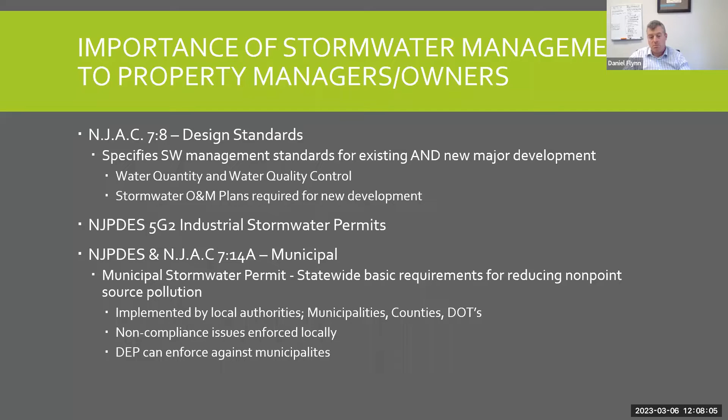So the industrial 5G2 permit, if you fall under this category, you likely know it because you have to prepare a SWPPP, a Stormwater Pollution Prevention Plan. You have to do monthly inspections of your operations. You have to do annual certifications with the DEP specifically, not just with the township.

On non-permitted sites, which is probably about 98% of the sites that are affected by this ordinance in Hamilton, you have to comply with the stormwater O&M manual. If the property doesn't have an O&M manual, which it likely doesn't if it was constructed before 2005, we just defer to the state standards for how the site's stormwater system should operate. The responsibility of that is the property owner or the property manager, ultimately the owner.

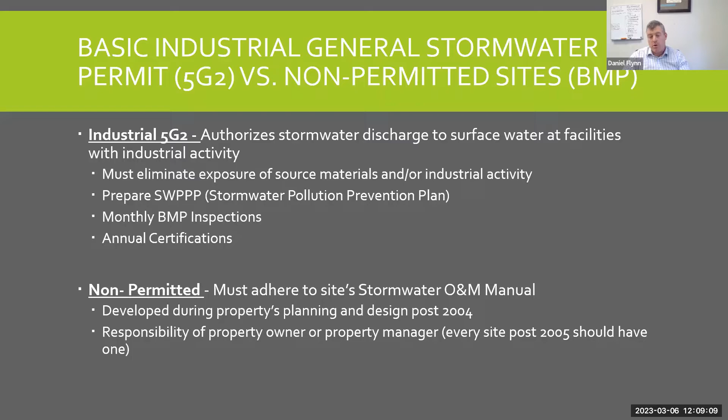It's supposed to gather probably between 2 to 4 feet of water, sometimes more, but generally they try not to make them too deep, and it's supposed to convey that water downstream in a methodical manner, which is designed to drain within 72 hours after the storm. So that's one of the things that we look for in the inspection, is whether or not the basins are drained, when the last level of precipitation was, etc.

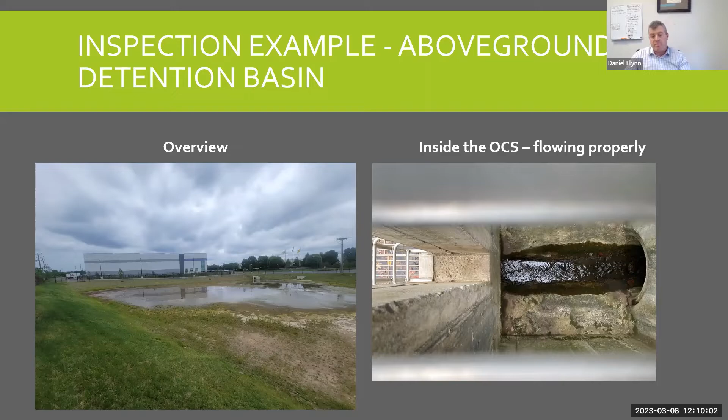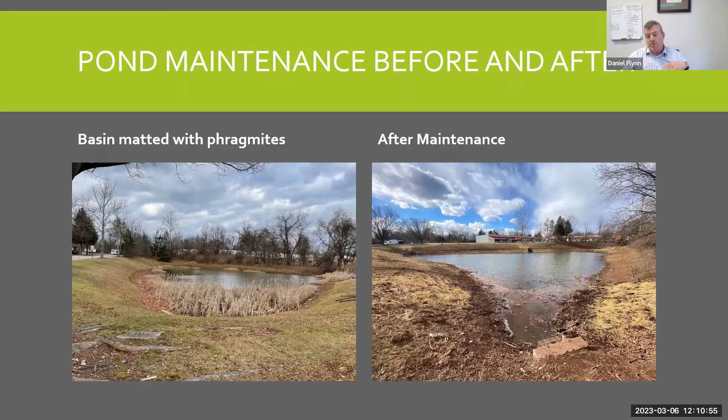So if you have a basin that looks like this and it's matted with vegetation where the water comes in or where the water goes out, that would be something that would be cited in an inspection, and the township would expect that that would be taken care of in a subsequent maintenance activity.

A lot of older basins in Hamilton Township have low flow channels, concrete low flow channels. The design standards today don't call for concrete low flow channels. We like to see usually more of an infiltration basin or infiltration berms or channels, sometimes riprap, sometimes sand, other materials like that. But a lot of older ones are concrete. They don't allow for much infiltration of the water or that much cleaning of the water for the water quality aspect, but they do promote the drainage and the flow in the basin.

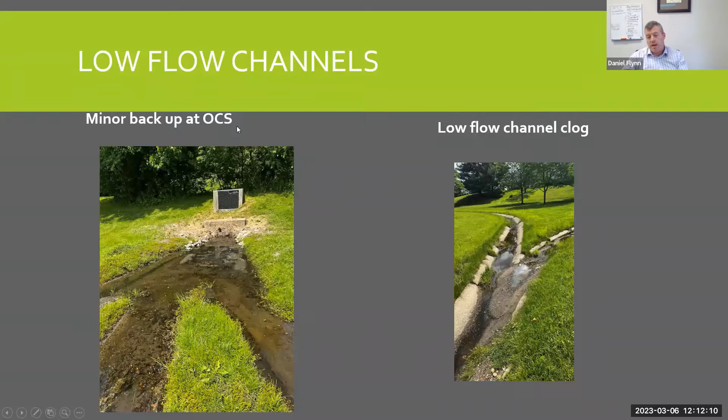So this is what happens. The water and sediment back up, the channels get full of vegetated debris, anything that's moving through the pipes, and then it eventually clogs the basin, and then the basin doesn't drain. And back here, this is what's commonly referred to as an OCS, which is an outlet control structure. This is another outlet control structure. So this is a weir with a trash rack on it. There's another trash rack. It's actually elevated here.

And then this low flow channel is about 5 feet wide on this one. They're usually between 3 and 5 feet wide. And it's got like 10 to 12 inches of water in it, and it's backed up with leaves and debris. So something like this would warrant maintenance, although it's not too bad. I mean, this can be cleaned out with hand labor or a small machine of sorts.

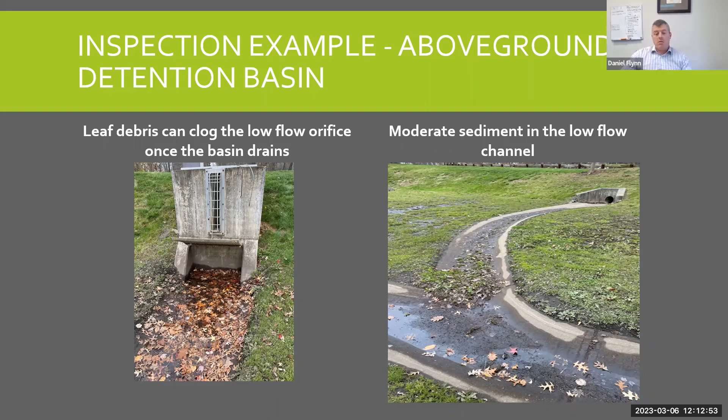So one of the things that we look for, this is a large outlet control structure. So the weirs should have trash racks on them by the current state design standards, and the orifices should have a trash rack over it. If I was going to say which one's more important, it would be the trash rack over the orifice, so it keeps the debris away from the hole so it doesn't immediately clog every time there's a precipitation event. Both are significant in different ways.

These large weirs will prevent large debris and garbage from passing downstream or clogging up the drainage pipes. Again, that's a comment that you'll see on a lot of inspection reports, and the township would like to see trash racks on outlet control structures like this.

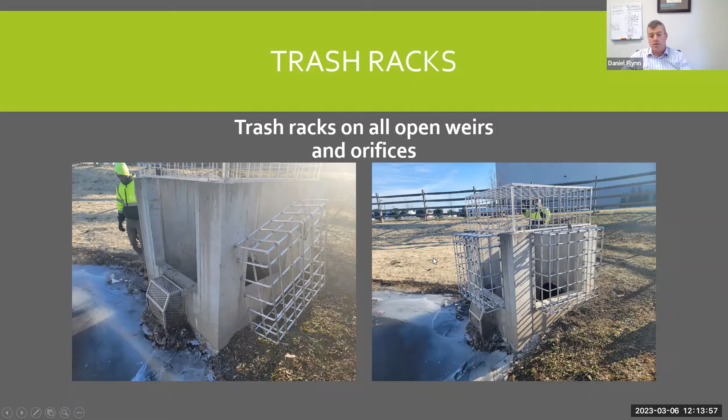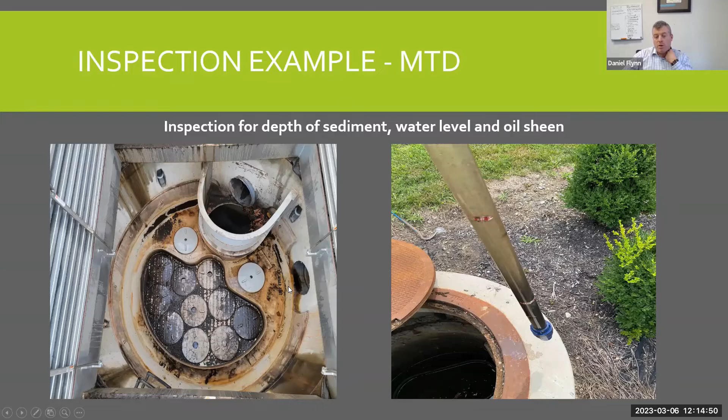And what we do when we inspect these is we use a sludge reading device, and we measure the sediment on the bottom; we like to see less than 16-18 inches, and no oil and grease. And these filters should be cleaned once a year on this specific type of device. It's a little blurry here.

So an inspection report will usually have photographs corresponding to the items that need to be corrected, and they'll either have required corrective actions, which is something that really should be addressed immediately. The items will have an immediate effect on the performance of the stormwater basin. And then the recommended corrective actions are something that we've put in our reports to aid the property owners in keeping up with some of the general housekeeping and other items that they come across on a yearly basis.

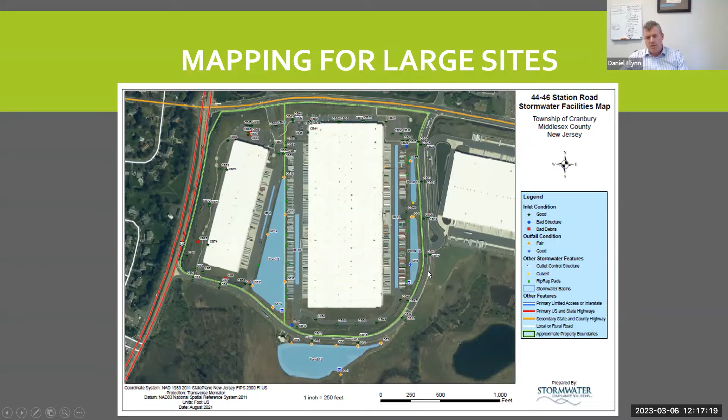It's probably going to have oil and grease on the pavement. It's probably going to have contaminants in the detention basin. So even before we really dig into the specifics of the stormwater BMPs, the best management practices, if we see that going on site, we generally know that there's probably going to be an issue. On the contrary, if you have a well-maintained, clean site, you have less frequent maintenance. The site usually doesn't have those things that I mentioned.

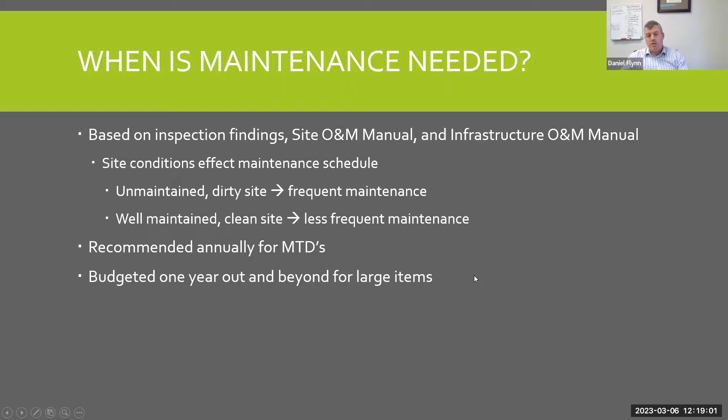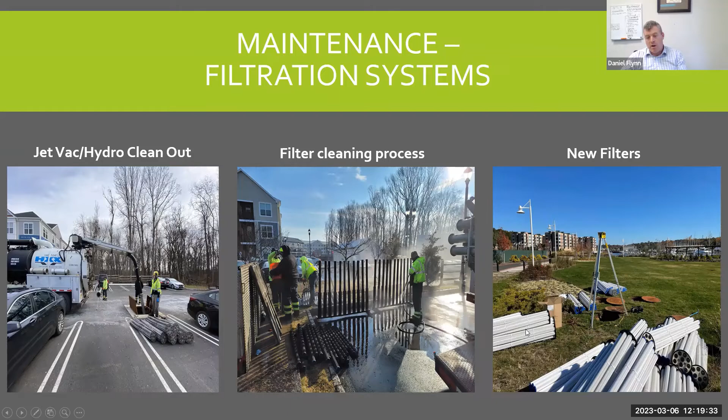So this is a Jellyfish washing operation. This is just how we do it in particular. The filters are usually pretty black when they come out of the ground, then they get washed, and the water gets reclaimed, usually in a bermed-off basin or inlet. There's one back here. The water gets collected and treated, and then the filters get put back in. And these are what brand new filters look like.

Another type of manufactured treatment device that often needs maintenance, usually every 2 to 4 years, while the Jellyfish system is every year, is a Contech StormFilter. Those, if you haven't seen them, generally look like this. They're cartridge filters. They adhere to the bottom of the tank, and the perlite on top is what cleans the water as it leaves the site.

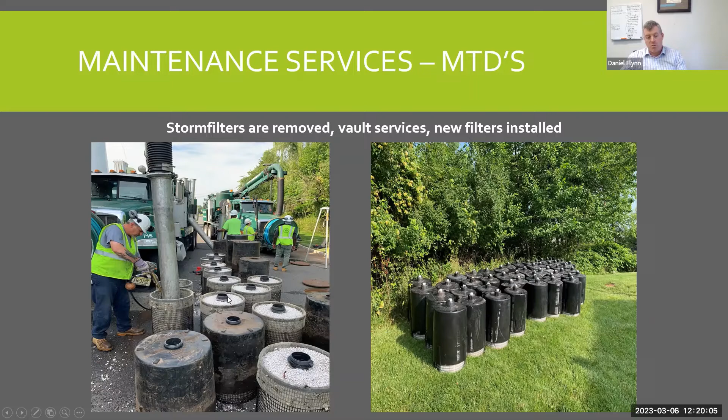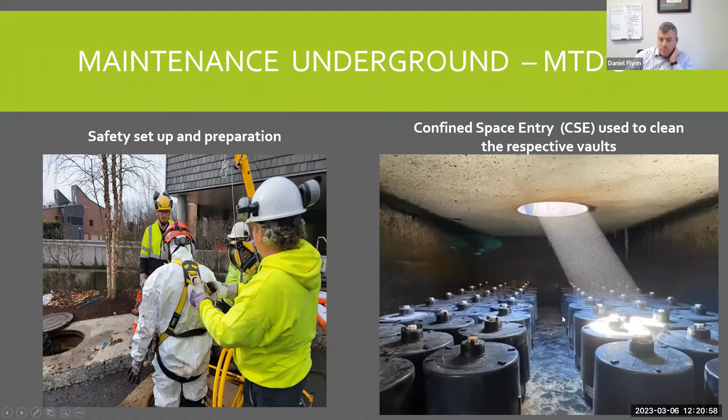Again, more on the confined space. Some of these things can get pretty complicated, usually depending on the site requirements. This, I think, is a PSE&G site, so there was some additional safety that was needed here.

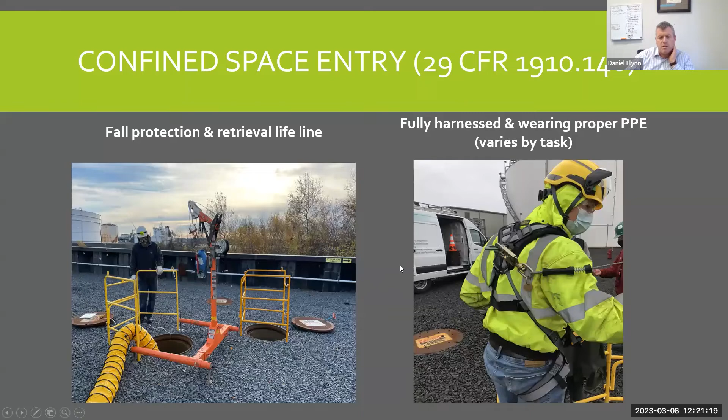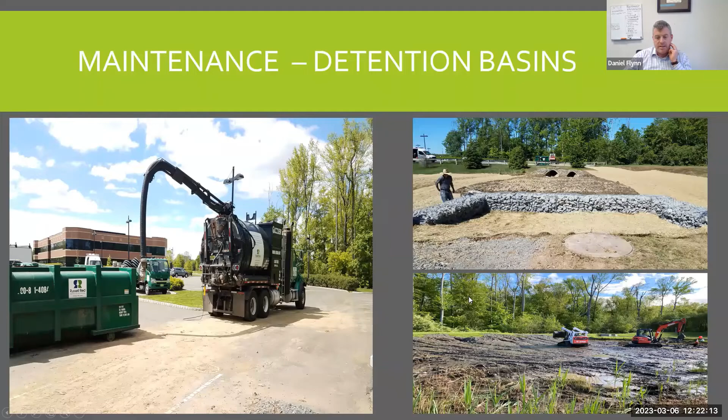We had some erosion around this outfall. So we installed riprap there to address the soil erosion, and then the channels were cleaned out, the basin was cleared. Same thing on this basin.